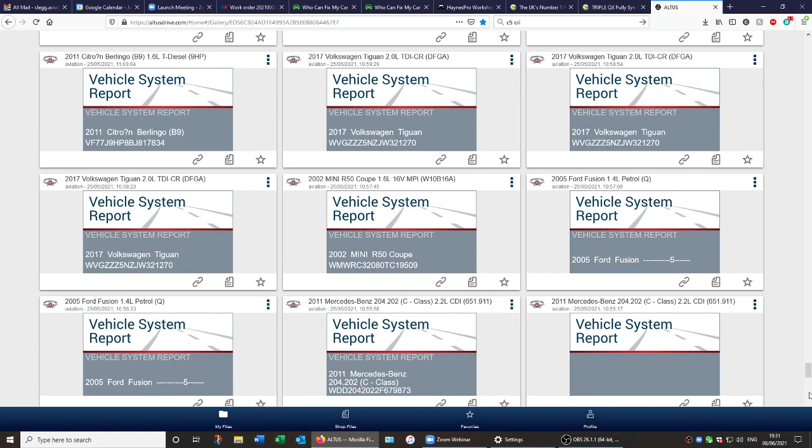It's worth noting, while I think about it, if you do a screenshot on your Zeus, that is also submitted to your cloud account. So when I scroll, you might notice now and again these are all reports, but as I scroll there might be the odd picture. That's a picture I just passed. There's a picture - that was a Corolla, I think there's a radar calibration, camera calibration I was doing. Anyhow, you'll see this in digital images. I'm sure I've got some - there you go, there's one there, I don't even know what that is. Test network connection, a few other bits and bobs. Okay, so these are all saved to my cloud account.

In case you're wondering, I got asked earlier today - if you press and hold the S button on your Zeus for 5 seconds, you'll see some icons appear. If any of you are watching this from the right-hand side, they'll come out the side of the software.

At the top, there are little buttons that appear: screenshot, camera, virtual keyboard, brightness. What I've done is chosen the S button. The Snap-on S button is right at the bottom of those icons that come out. Touch that, and then you can change what you want the S button to do yourself.

I've chosen a screenshot. So just quickly, if I press the S button, did you hear that guys? So it's just taken a screenshot of my home screen now. And then hopefully, if I refresh, see how good my internet is here. There you go guys, look.

So my name's Steve Fox. Obviously there's the date, guys, look. That's strange, well, I've got the wrong time. Ooh, I'm bad, I've got the wrong time set. That's my fault, I've got my account set up at the wrong time. I need to look at that clearly, don't I? Okay, but there's two screenshots that I've just taken actually there, right?

So I don't know, let's have a look at one, right? So if I click on here, it's just going to bring that up as a still photo. However, if I come back and look at one of the reports, if I look at this one, click that button, it'll open up as a PDF.

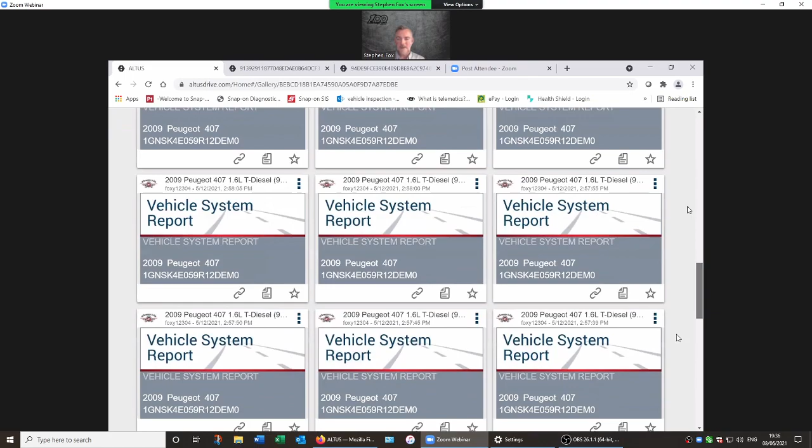Right, so where do we go to set this up? Actually, you know what, if we come back, get rid of that, I'll utilize this. So there's a couple of bits I want to show you. I think I did see one - there was a Corolla calibration.

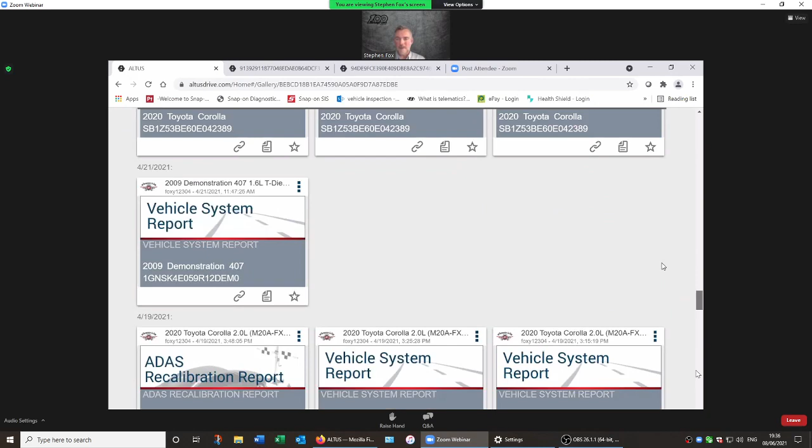So yeah, there's my Corolla scan, so there's a calibration report. So ADAS, Advanced Driver Assisted Systems.

Whilst I'm on this, I might as well just talk briefly about it. In 2015, a lot of manufacturers, via Euro NCAP, stipulated that to achieve a 5-star safety rating, they had to install 2 mandatory ADAS-associated safety systems. That could be ultrasonic park sensors, blind spot monitoring, whatever it happened to be. The point is, in 2015 they had to have 2 of these on.

Now next year, 2022, manufacturers have been told they've got to put 11 mandatory systems on. A couple of them will potentially be daunting. One is an alcohol interlock system of some description - you'll be breathalyzed before the vehicle will run. The other is a speed governor of some form. However, I'm led to believe you'll be able to turn those off, but still, the principle is they will be on the car.

As I've already said, in the future when we start looking at Wi-Fi, 5G cellular network, eventually they'll no doubt be networked - I can see it in the future. I don't know if it'll be in my lifespan, but there's a few targets and goals. I'm sure you've seen publicity around zero emissions and how the goalposts have moved rapidly. Lots of manufacturers now have been tasked with level 5 autonomy by 2030. From an EV world, JLR quite recently publicized that they think by 2025, 60% of their network fleet sold revenue vehicles will be EV. So you can see there's a trend coming, and then they'll be networked - that's the plan. So, advanced driver assisted systems.

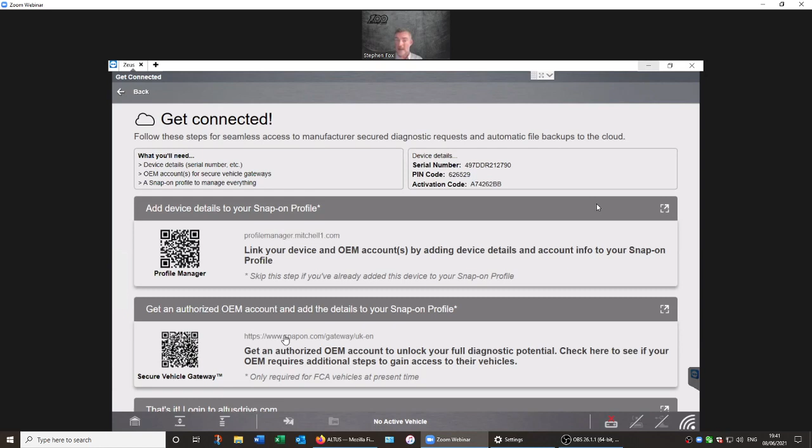Starting at the top, we have a profile manager - this is for your secure vehicle gateway access. You need to set a profile manager up, something that differentiates you with our scan tool to talk to Fiat Chrysler Automobiles. The next one along directs you to our website to show you what and where to go to set up the Fiat Chrysler Automobiles, FCA, website information and get authenticated with them. And the third one down is our Snap-on Cloud reporting, what you guys have just seen me show you.

All right, so that's altusdrive.com. Notice as I move my cursor, we go from a triangle - excuse me, I've just clicked it accidentally, profile manager was loading up - to a little pointer. If I move it down, it goes to the hand. It's a hyperlink. If I touch it, as it just did, it will open up a web page, because it's a PC, which is great. It'll just open up the page and start the process for you.

All right, so that's where I was setting up my cloud account. It's going to ask you, in your Snap-on Cloud, your Altus Drive at the bottom, your name, address, 3 security questions - it's quite security conscious - email address, and mobile phone number if you use it. But food for thought, definitely have a look. It's a cool feature that we're obviously going to add more features to.

Right, let's move on from here - paired devices. Now you shouldn't need to go in there, I pray and hope anyway, but it's a Bluetooth interface scan tool module. The Bluetooth module you plug into your vehicle is paired by Bluetooth. I don't think you'll have a need to go in there. The only reason, if I'm honest, is if we need to flash the hardware on it, so when you have a software update, ideally you should plug in - the scan tool doesn't update on its own.

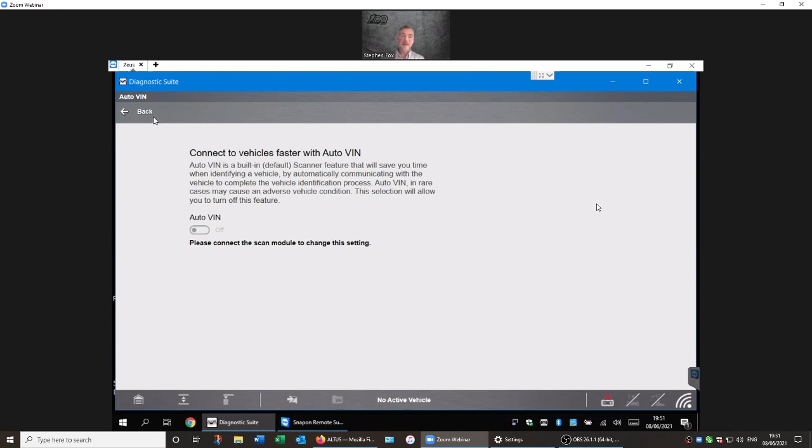What we'll try and do is take that from mode 9, because it's the OBD. Sadly, depending on the vehicle year, it won't always work. So you can turn that off if you wish by clicking it to off. But wherever possible, it's quite a nice feature. And like anything, as the years roll on and the older cars start falling off, we'll end up with a nice newish market, and eventually the older stuff will start falling off.

Right, fast track intelligent diagnostics, bottom left corner. And then I'm going to go into scanner.

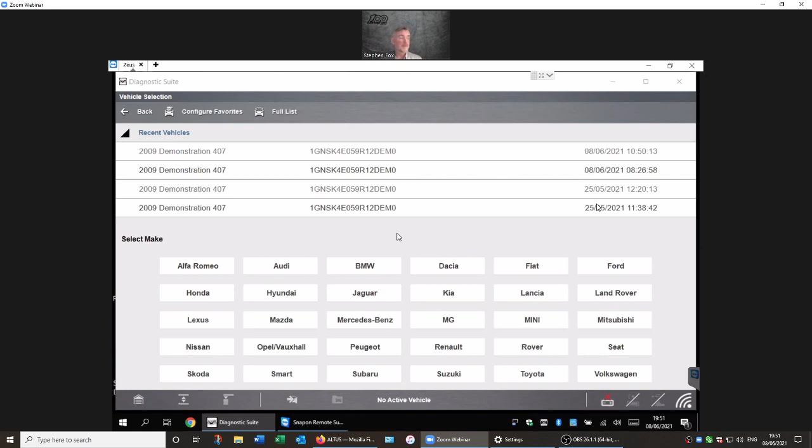You'll see these screens, these little black screens appear now and again. In case you were wondering what they are, predominantly for the franchisee network, because they're obviously demonstrating this out in the field - it's to help them really when they're talking to customers. So I've got into demonstration.

I'm going to choose my Peugeot. It's going to advise me - I'm in demonstration mode. Automatic ID and manual is going to try and pull all the credentials from the vehicle wherever it can. Again, this is incorporated in the engine control module, and some vehicles are not there. It's going to pull the VIN - we've got the VIN, let's assume make, model, year. And then mileage and the registration, relatively new feature to us.

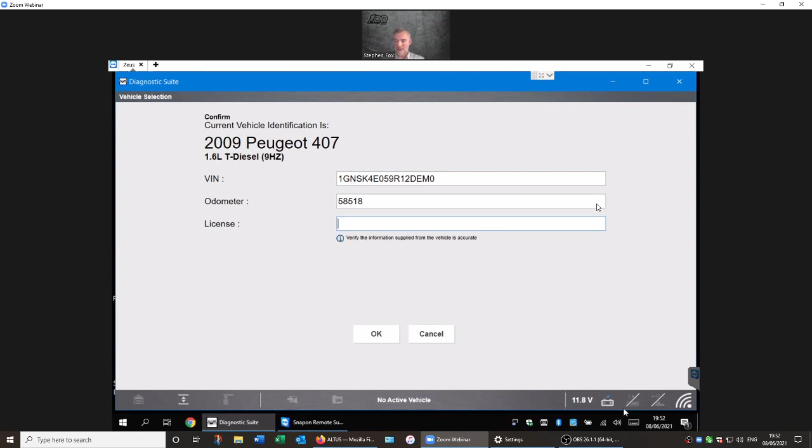So mileage, we try and get that from the instrumentation cluster, and then obviously populate our registration. Okay, so we're just going to populate a registration in there. Do you know what? Let's put in Rex. Right, JJ.

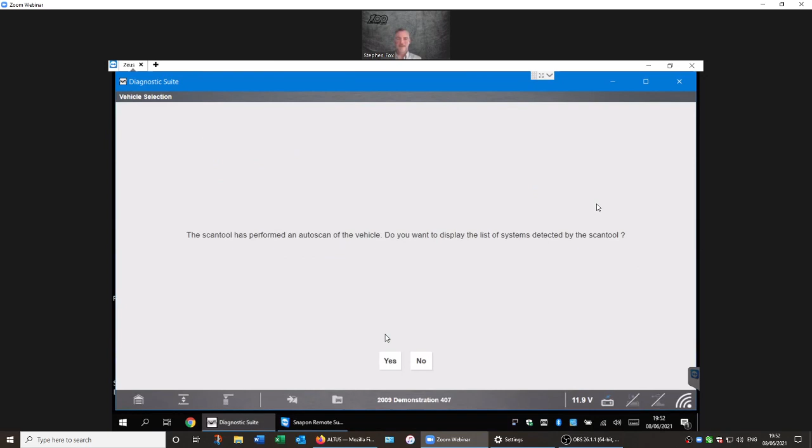Okay, so do a list of scan modules? Yes, I do. Right, at this point, if we've got communication and we're on subscription, hopefully you'll see it says service resets and relearns. And what we've tried to do here is retrieve all the common denominators from each control module, which we're looking at in this example. And we tried to put all the common service resets and relearns under one icon to save the customer having to navigate into each separate module to find said requirement.

All right, so hypothetically, let's just have a look at this one, and you're going to see these appear - so EGR, replaced injector, brake bleed. All right, so you get the idea, DPF regen and so forth. That's the idea - we try and retrieve it and pull it.

Code scan, right? Let's go to code scan. We mentioned this pre and post, so ideally I've not touched the vehicle - should really do a pre-scan. And as I said, don't forget, there's lots of independents that request this, certainly from a body repair specialist.

And if I'm totally honest, I wouldn't be surprised - this is not formal, guys, this is from me to you watching - I wouldn't be surprised if in the future we are tasked and they actually make us do this pre and post, simply because of ADAS.

Okay, so if you're going to adjust some suspension geometry, or ball joint, a track rod end - think of what I've just said - anything simplistic, take front bumper off, we need to obviously document that, right? So pre and post is going to be the way to go.

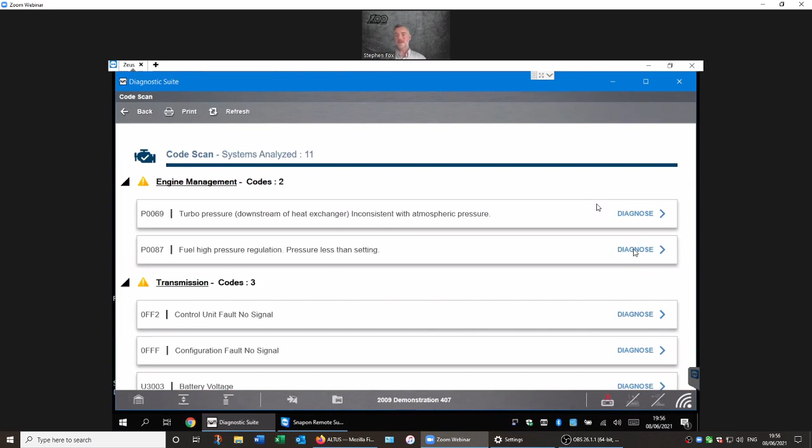Okay, so back to intelligent diagnostics. I'm going to choose under two codes, P0087. And then you'll see there's a major delay - I'm already on the Zeus. Come down here, give it a try.

So this is our landing page for fast track intelligent diag, and this was launched, as I said, on Zeus. As it says here, it's important we're on internet because it says connected.

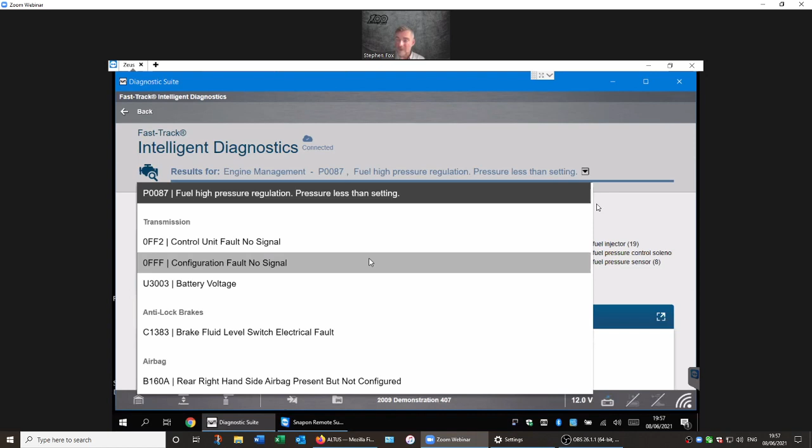All the other codes, see this drop down here - I want to address this because I've had a couple of customers say, well, do I have to go back up and choose a different code from the code scan and then come back to this screen? No, they're all in there from my code scan. I just choose the drop down, choose the code, and all the data will refresh based on the chosen code on our landing page. But I'm going to stick to P0087.

Over to the top left, TSBs - technical service bulletins and OEM recalls. As I said, this is a repair information suite. This icon takes me into the information icon on your home screen, except we're already in the vehicle, so it populates that information. This TSB with the red circle tells me straight away on this vehicle, on this fault code, I have a TSB and a recall. And I want to address that.

This vehicle, that fault code, I have a TSB. If there's a green tick there, then you're all good, not applicable. But I want to address it because certainly the previous machine, we had a Verus Edge - it had TSBs and recalls, but it didn't have fast track intelligent diagnostics and it wouldn't filter that out. You might have to look through 30 or 40 TSBs.

I can remember we had a Golf, a 2012 1.6 Golf - can't remember the engine code, guys, it was a 4-digit one. Anyway, it had an umpteen amount of TSBs. And obviously, with a fault code, you've got to look through them, and that's time, right? So with this, it's going to tell us straight away the TSB or recall related to that code.

So I'll obviously click that now, and it's going to take me to... I don't want to do that because I'm conscious of time. Over to the top repairs graph.

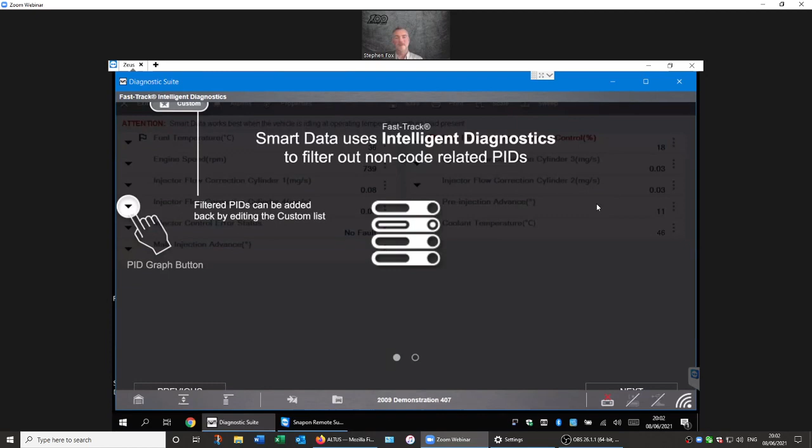In our example here, if I click into smart data, it must be on the internet, and the vehicle must be up to temperature and idling. Give it a try. Yes, ignition's on and I'm running. You'll see that all the parameters would normally be on both sides here, and I'll have to scroll.

Take a note of the 2 blue ones. The blue flags, 2 blue flags, that means we're watching the live data values and we know if they're any good or bad. So we've got rid of all the stuff we don't need, left you with the stuff we do, and we've said these 2 here, we know what good looks like. In a minute they should go red, which indicates red flag, red value means that's an issue right now, out of tolerance right now. Red flag, blue numeric value means it's fallen out of tolerance but it's back within spec right now.

That black screen that appeared was a recording of live data. And remember our job card down the bottom here, which I saved with the PDF? Touch that, look, there's the demonstration vehicle being recorded. So it's actually recorded a live data video, straight to the vehicle job card on our software.

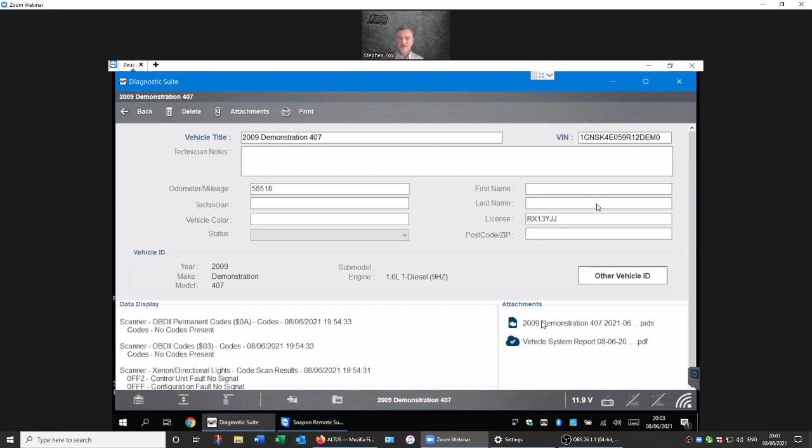Remember, you can back this up on the USB stick. Home screen, bottom left, back to scanner, that's going to take me back where we left off.

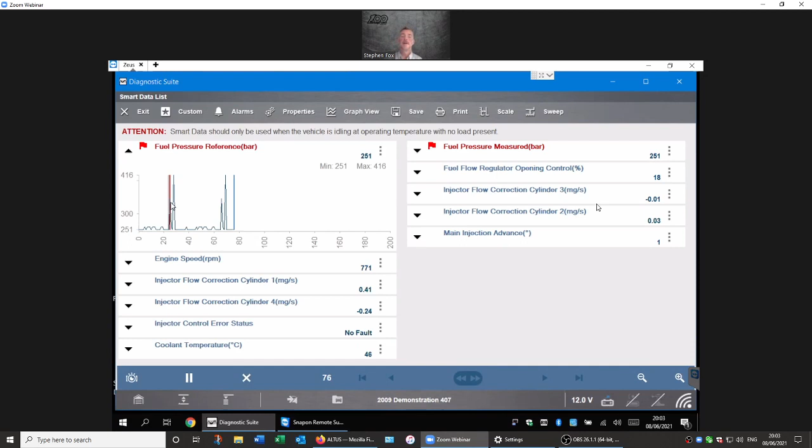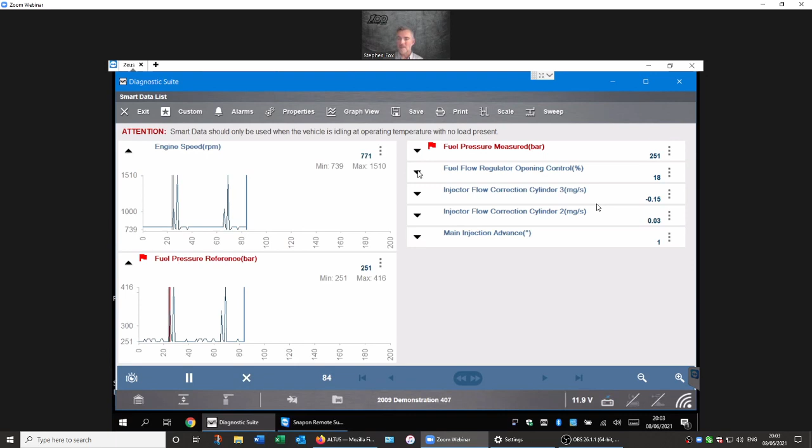If I drop one of these graphs down, the arrows next to the vehicle PID, the red vertical line is going to indicate where your tolerance exceeded a good known value. Every other PID, if I drop down, they'll always jump to the top. You see, I clicked on engine speed and it was beneath, and it jumps to the top. So fuel control opening percentage value jumps to the top. But notice the gray vertical line, that's going to relate to where my red vertical cursor fell out of tolerance. It's visually going to help me diagnostically relate all the other parameters.

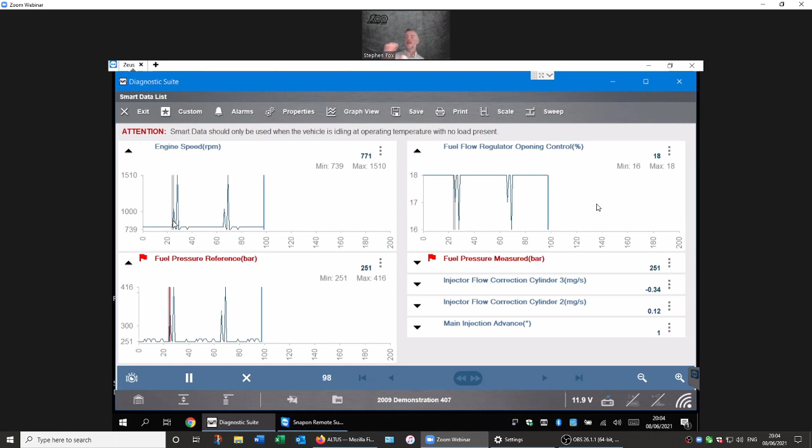So that's what smart data is. Back, top left, go to exit. I could go back into smart data, which I don't want to. I could wander off down here anywhere on the vehicle. Top left again, I want to come back to our landing screen.

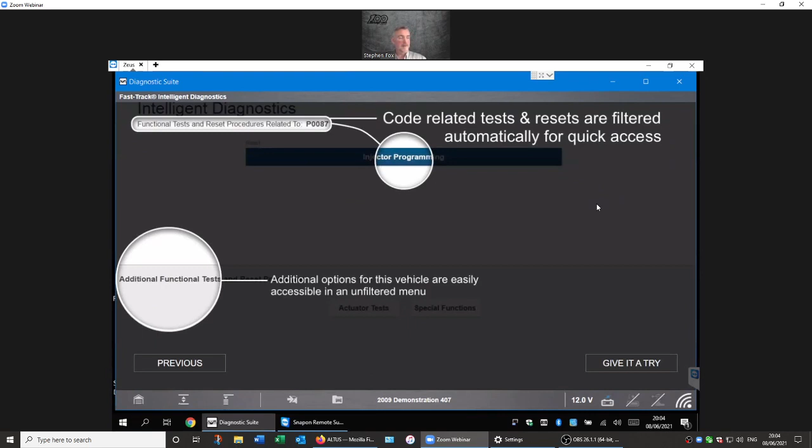Next one down from here is functional tests and reset procedures. We've noticed certainly over the last few years, if I give it a try, because we basically capture all our own software.

We've noticed that a lot of the OE factory tools are starting to put certain functions and features in perhaps the least expected place. So they might put a particular function in a module you kind of least expect it to be. So again, everything you need, nothing you don't.

Fast track intelligent diagnostics. If we have this information from that code, based on what you guys have just seen - if you remember, my common denominator at my top repairs graph was injector - we're going to make the assumption now that if you're going to replace that, you're probably going to need to program a new one in once you've replaced it. This could be anything. It could be we've got a misfire now and I need to reset fuel trims. It'll be in here, for example.

It could be a window regulator issue and there's a functional test to check the functionality of that regulator. Does it make a noise when I activate that solenoid, for example, hypothetically? But yeah, so this is the idea - we isolate it into one icon.

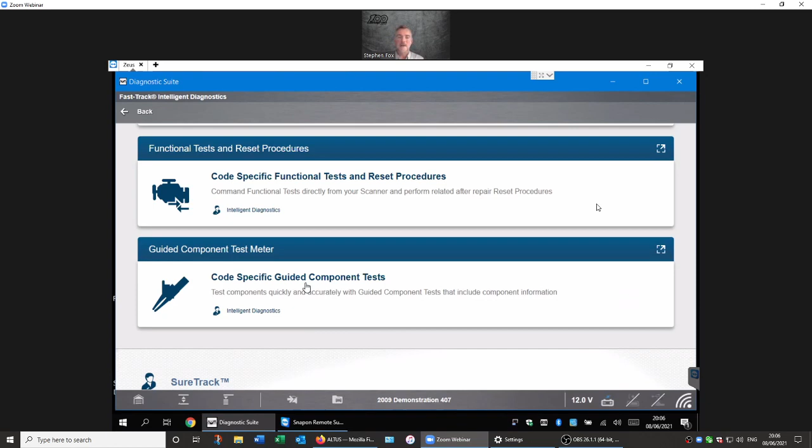Oh, no updates, that's good. Right, so top left, if I then come down, guided component tests, we'll expand on that in a second. 13 years we've been collecting this, and I want to address that we collect this out in the field ourselves. We don't purchase this in. And as I said earlier, if you picked up right at the very start, I was heavily involved in this for those 6 years when I started at Snap-on, my first sort of 6 years of my career.

So guided component tests, scroll down, give it a try. You know, it's going to say we need to test that injector. We don't want you ordering a £300 Ford Galaxy injector from Ford's and then getting it wrong, right? So we need to test it.

Component information, DC, we'll dig into these in a little while. Signature test, that's the integrity, isn't it? And then current ramp - it's going to be a current ramp test on the injector because the injector is classed as an output, right? So we have inputs and outputs.

Then we have inputs like cam, crank, boost pressure, intake air temperature, mass airflow - they're all inputs. They send the information back to the ECM. Whereas if we take a fuel pump, solenoid, actuator, that sort of stuff, they're classed as outputs. And fundamentally, the engine ECU dictates current flow through to those components depending on the input information to denote how much requirement is needed for our fuel pump, injectors, etc.

So in this case, if we know how much current flowing through our injector is actually going on, then we get a nice, good, true analogy - actually, is that component doing any work or is it not? Because remember, an injector could have voltage sent to it, but really I want to know what current's flowing through it - is it actually doing anything? And the beauty is with a scope, it'll generate a waveform, and that waveform gives me a true analogy of what exactly is going on with that component.

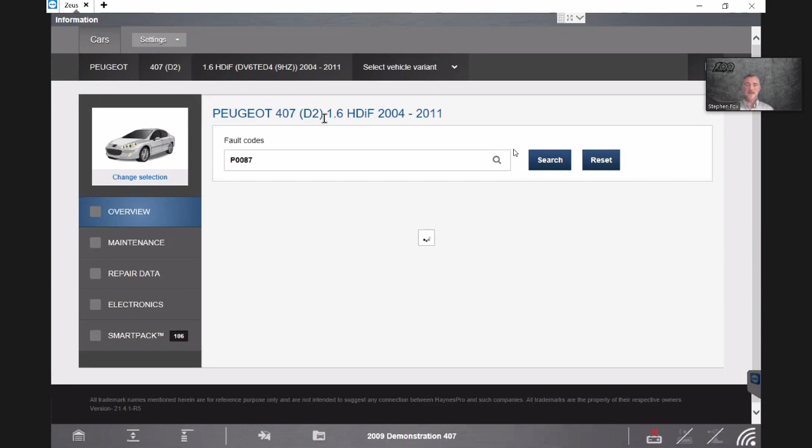Okay, so this is our repair information screen, remember? There's my Peugeot, 407 1.6, 9HZ, P0087.

It's going to give me an option now. So over the left, repair information, repair data, maintenance. So frequency, service intervals, what do I need to check? Do I need to change the pollen filter or not? API rating for oil quantities, drain plugs, repair data.

If you've ever changed a timing belt on an XYZ car before, it's worth having a look. There's repair information in there, a nice step through removal and installation process of a timing belt using this Peugeot. And there's also drawings associated, and it gives you the timing pins, the OE part numbers for the timing pins.

Electronics, so wiring diagrams, test plans, we'll get to them in a second, and smart data. On the left here is your OEM campaigns, recalls, and technical service bulletins. So I'm going to pick the top one.

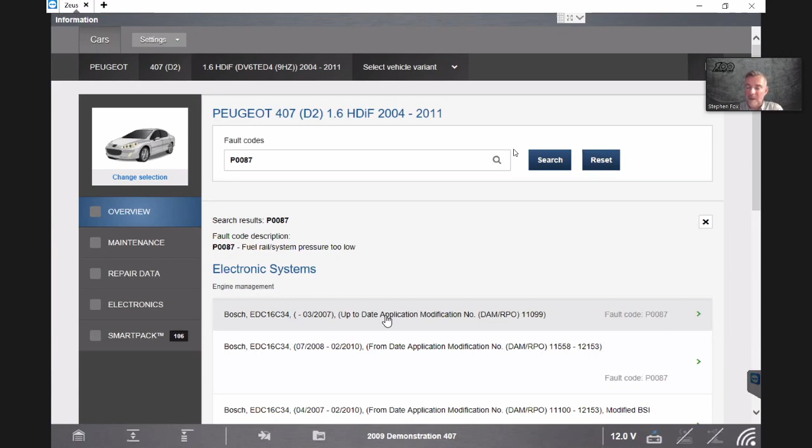It does look, if you notice my Peugeot, it's kind of derived from the year that's applicable. So I'll just pick the top one because I want to show you some of the features in case you was unaware. So that was directing me towards a fuel pressure delivery issue.

So I'm going to go with control valve. Now over here, look, it's isolated circuit. E1 is going to be my engine control module. We've got a motor there, valve control motor, mass airflow incorporating intake air temperature. And this one, the red box, is going to be our fuel pressure control valve. Okay, so that's red, notice we've got pin 1 and pin 2.

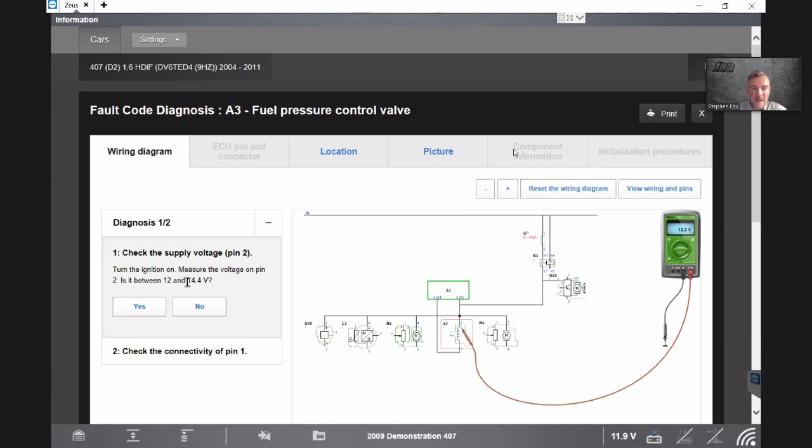Over the left, it's going to say, right, diagnosis, check the supply voltage, shows me where to put the probes and the multimeter. And it says, over here, should it be, I don't want to read it word for word, X and Y voltage, yes and no.

Last test. You'll always find at the end of the test here, in case the answer is no, you've got to be redirected to somewhere else. In this case, it's telling me that I need to go to the engine control module. I'm not going to do these 7 or 8 checks, whatever there is.

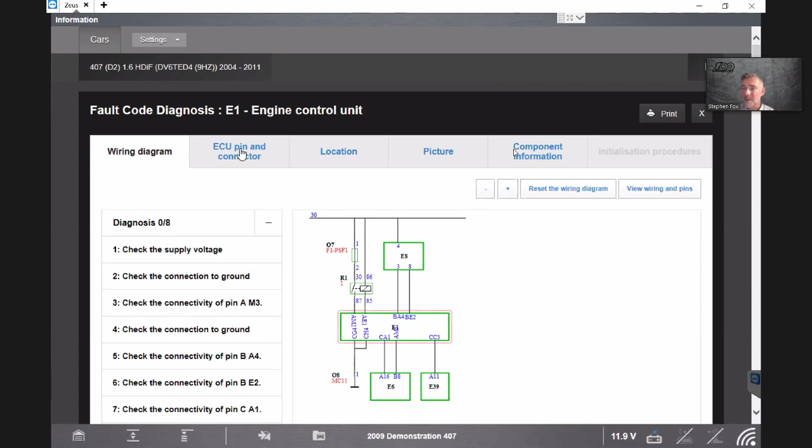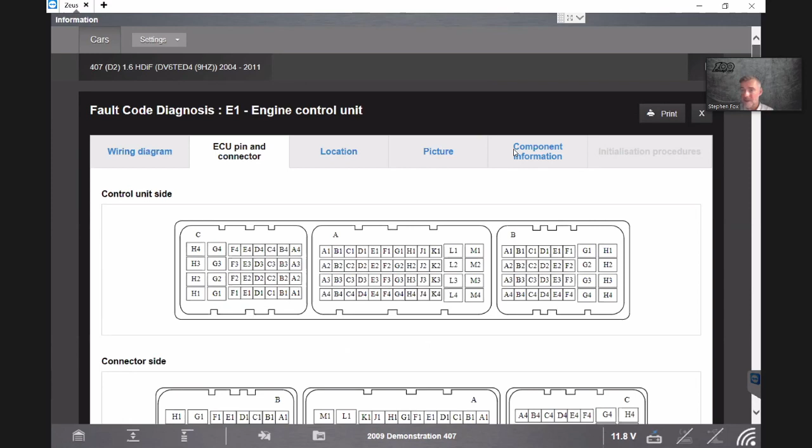But whilst we're at engine control module, if you take a look at pin data now, ECU pin data, both control unit and connector side, and all the pins are underneath. And if I then click on the word show, you've guessed it, if I go back up, this is very similar to most tablets these days, pinch and zoom in the repair information.

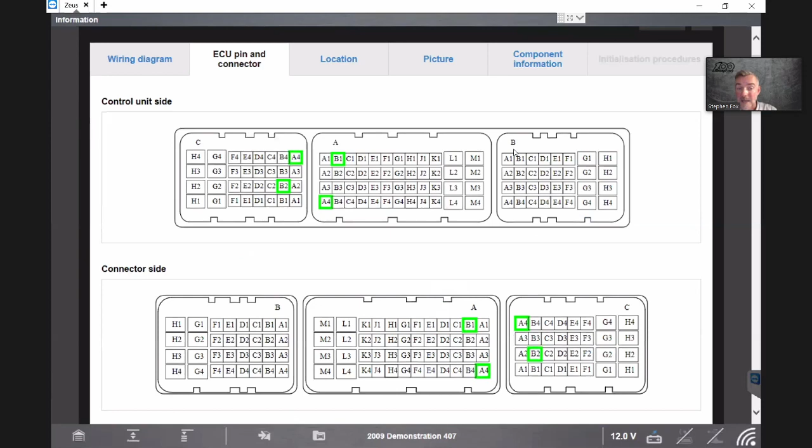You can actually see my fingers that have been held on the screen. Okay, so pinch and zoom.

Obviously, you may or may not have noticed the top right corner as well. Everything in the repair information always has print at the top right corner. So you can print it if you've got your Zeus connected to a network printer, hardwired via USB, or however you've got it set up. Or obviously you could download this, because we're viewing my Zeus locally, as a PDF directly onto the Zeus itself.

So location is going to tell me where the engine ECU is and all the other modules associated.

You can tell my son's at home, can't you? Look at the internet.

Picture. So there's a picture, obviously, of our engine ECU and component information. So it's worth noting, a couple of times over here, I've been on a component, say fuel pressure sensor, and it's actually giving me the live data readings and oscilloscope waveform settings. So it's pretty cool, worth definitely having a look at.

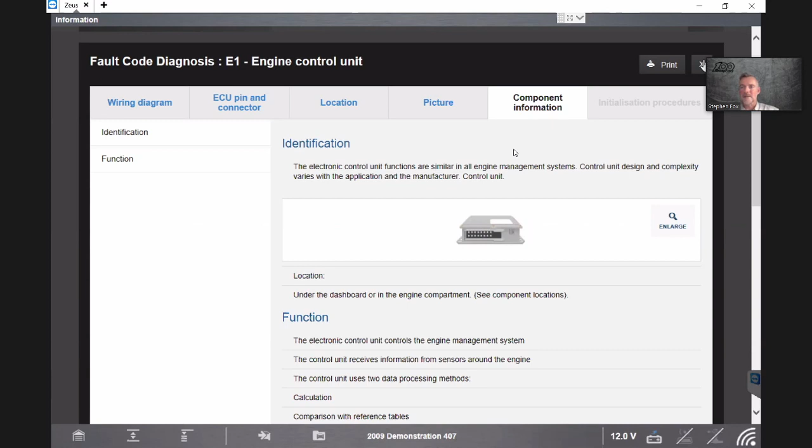Okay, so if I just close this, I'm going to close this now, hit the cross to close that down. He says, I don't want to keep pressing it, do you, Steve? No, because this is where it all goes wrong. There we go.

Okay, so if I now go to top left and go to cars, you'll see there's a registration lookup at the top right. Now, there's so much of it, to be fair, in here.

You can even go into settings. Oh, my cursor's having a wobbly now. Go to settings, go to preferences, and tailor your account settings. So when you print from this information suite, that also has all your business details. You can even build up invoicing incorporated in this information suite on your Zeus. And you can do euros, pounds, VAT, quantity, there's loads of stuff you can do. Just need to have a look, guys, at this and spend a bit of time in here.

So I wanted to do, because I've still got quite a bit to do, is put a registration in here. Now, you can see there's a few oddball manufacturers down there, which we could look at, but I'm still hung up over this.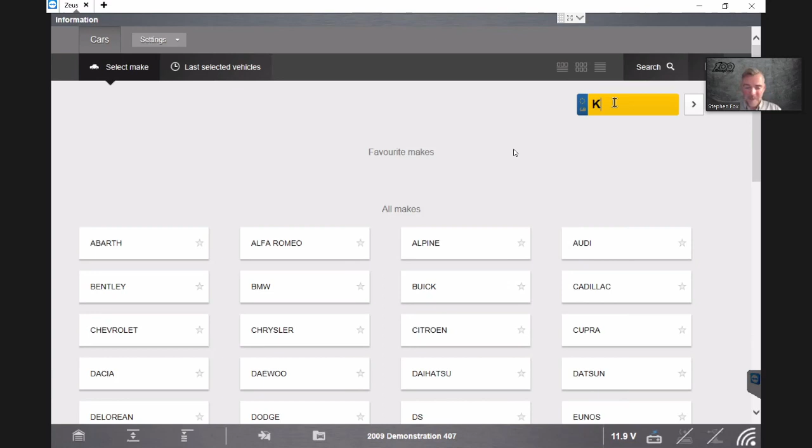This registration I put in, I do think it was last month. We're in May, it must have been May. I was live in front of customers like I am now. And this is my company vehicle registration, hybrid Corolla. I put the registration in and clicked the button.

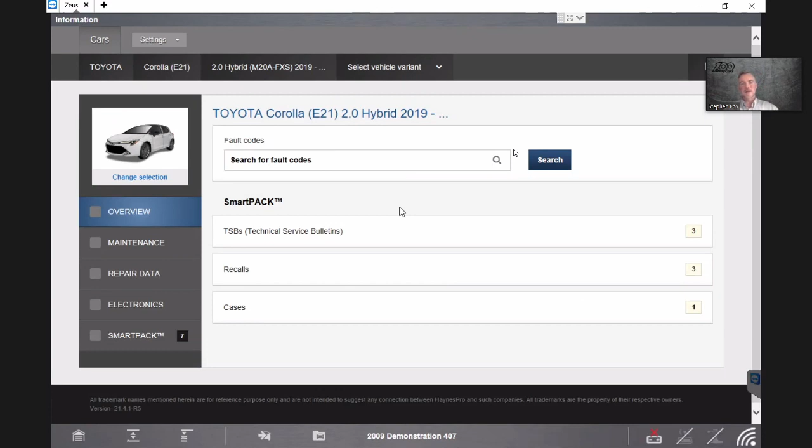I just randomly put it in, and I was like, oh my God. This is ironic because the TSBs here, I clicked on and I was like, no way, adaptive cruise. For a little while now I've been noticing it's due its service, I think it's done 16,500 miles roughly.

These Corollas are every 10,000, so it'll go in soon, won't take long I'm sure. But anyway, there's been occasions when it's switched on, I'm following a car, let's say they indicate, they turn off, the car brakes fine, they've now gone, they've made their decision and gone, but the car still drags the brakes on for far too long, in my opinion, and then it starts to accelerate.

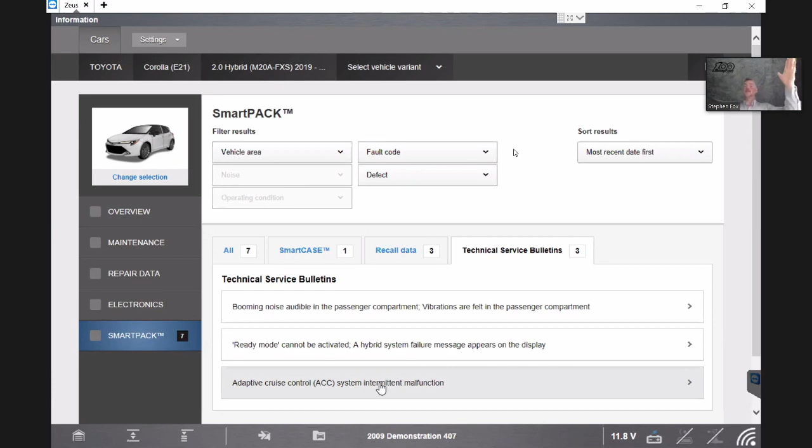So I don't know what that's about, but I happened to see this and I clicked the button. I was like, oh, that's strange. So they've obviously got some sort of issue related to the radar sensor, but it's quite cool because it says I need to check the serial number.

Obviously I'm not going to remove my bumper and start having a look, because I've got to do that to get to mine on the Corolla. So I'm not going to do that, because I'd need to calibrate it. Although I could do it at work, but it's irrelevant.

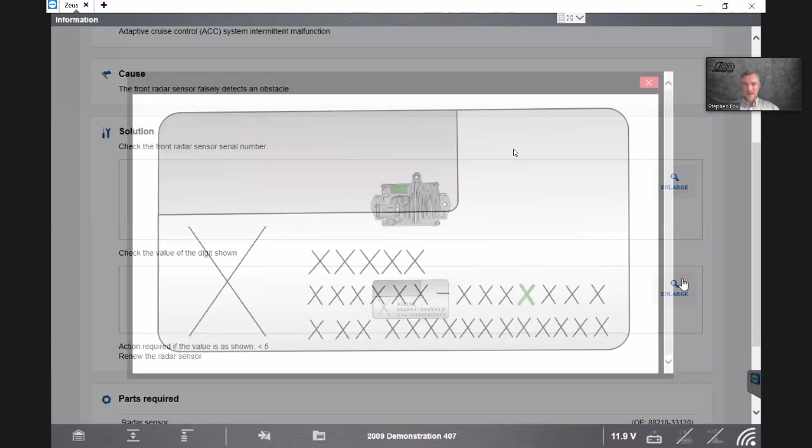But if I look down here, it's saying I need to check the serial number, okay, so it's on that plate. And over here, check the value of the digit shown, continue. Right, that's the digit I need to pay attention to. Then it says here, action required if the value is as shown under 5, alright, so renew the sensor. So I am quite curious to see what the outcome is when it goes back.

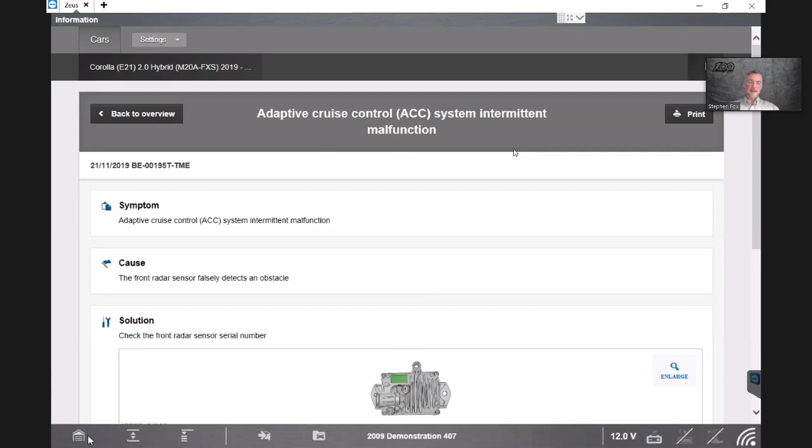Definitely, okay, anyway, right, so bottom left I'm going to press change vehicle. Okay, and then I'm going to hit scope multimeter. Now, unfortunately I've left that still from the last time, so what I'm going to do is move my camera.

I've got so many things on the go here. Hey, right, let's get this shut down. Shut down. Oh, hang on a minute, is that because it's open somewhere else? Right, it doesn't matter, it doesn't matter.

Okay, right, so on our home screen now I'm going to go into LabScope, if you happen to be with me. Yes, there's a few options here, presets. You can actually save your own presets, so maybe you go into the blank scope multimeter, spend a while setting something up, and you think, I've got it, oh, I'm going to forget this next time round.

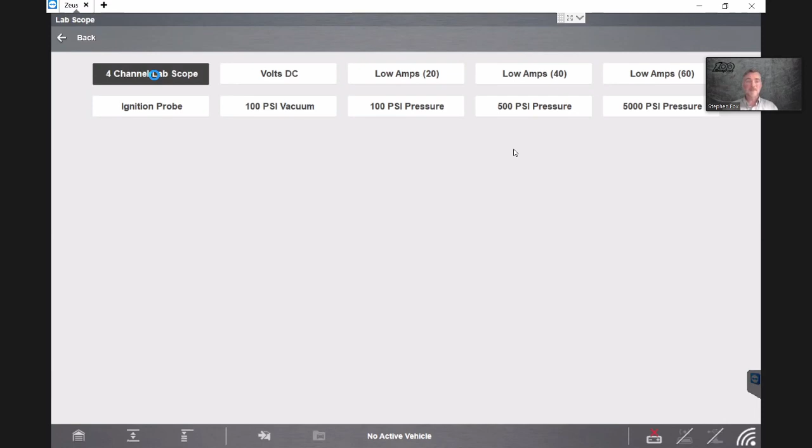I test a mass airflow, you can actually save it and then save it as a preset and name that file. But I'm going to go into scope multimeter or lab scope, choose 4-channel lab scope. Now you'll hear that noise - that's the scope calibrating the circuit board, little relays, cleaning the contacts.

If you've never been in here before, guys, you will probably see something like this. I don't know if you've seen that, or that, but I suspect if you've never been in here before, probably what I'm looking at right now. So we've got 4 channels switched on, i.e. we can test 4 components at once.

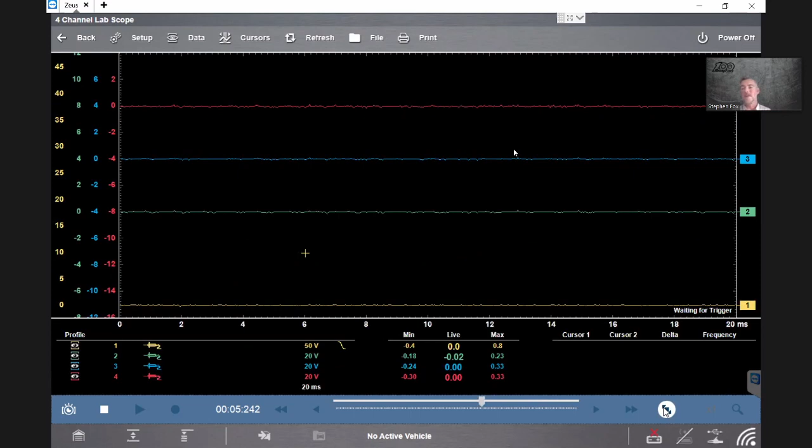We're going to change some values, okay? This screen is full screen scope, and this screen is data. I'm going to measure something utilizing the scope. Data, diagnostic data, let's call it. So data to change, we're going to make a change on full screen scope, and then data that we're going to evaluate from a diagnostic point of view.

So what I'm going to do is get these other channels off. Over here, under word profile, switch off everyone other than my yellow one. Zoom's quite cool these days, it's come a long way. Look, second camera - you can see I have my Zeus next to me, my waveform generator board here, a little car, and I had these probes connected to the top. The reason I've done this is to show you how to connect up your scope, because I do not want customers to damage their Zeus module, their scope module.

In a classroom, at this point in the afternoon with a set of customers, I get all the Zeus scope leads out of the kit and have them connect them up to the Zeus how they think they should be connected. It was brilliant because obviously everyone would look around at everyone else, all the peers, making sure they don't do anything wrong. And the answer is there is no right and wrong.

Not really, because you'll get the same answer if I leave this hanging, the same answer if I put them both in, the same answer if I just put this one in and take this one out. Because if you look, guys, I've got 2 black leads and I've got 1 on the other end, so it's a common ground. But I would like you to do what I've done.

That's a flat right angle probe, and this one's got like a stalk on the end. So pull that one out, so that it's perfectly got the right angle probe, pop that in there. The reason is when you get the yellow probe out and go to connect that up, because maybe one day when you get into your scope, you think, I want to test the cam and crank sensors simultaneously and check if the timing's out.

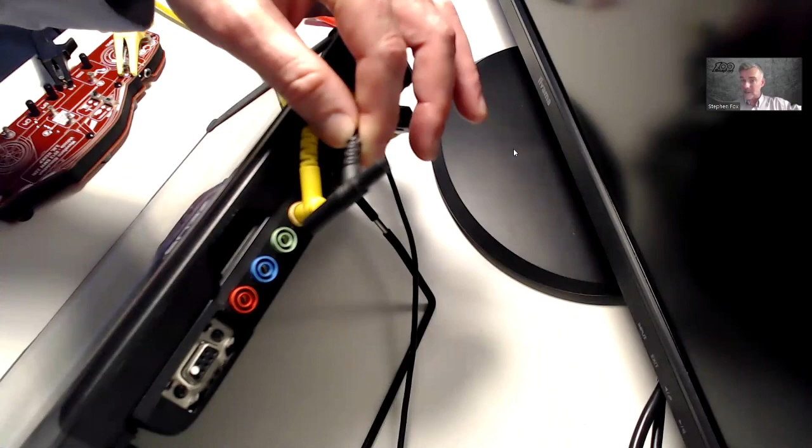So maybe I want to see if the belt's jumped or chain stretched, because that's pretty cool - some nice feature you could do with a Zeus with a scope. And maybe you think you want to do that - you put in your green lead, and the green lead has another black lead which needs to be grounded. So what I'm asking you to do is, if you'd be so kind, to just piggyback your green lead's associate black lead onto this one. That way you don't end up with a massive stalk up here.

Because what I have seen over the past years is customers connect it like that, and then, you guessed it, they're in a footwell testing an accelerator pedal position sensor one day, accidentally lean on the Zeus, and there's a crunch. I bet your bottom dollar it will not be the leads that break - it will be the leads that cause the scope module internally, because that's plugged in, to get a nasty little crunch, and the Zeus module goes down, and then sadly it'll have to be sent for repair. And then obviously they're going to ask, hey, what was happening here? So from my end, just try and keep these all nice and flat and nice and neat.

So what I'm doing now is going back to my Zeus, and I'll probably go back to my camera. I was just thinking, can I do that now? No, we need to come back to here. Right, moving across the settings, channel 1. All right, so I'm on channel 1. I'm going to test one component, yellow in color.

Next over is probe. If I touch on probe, now at this stage I can't see you guys, of course, but in a classroom, people would frown now - vacuum pressure. Now the scope, obviously, we have the blank canvas scope that you guys get in a kit, and you have the 4-channel scope leads, you have ignition probe, your little copper adapter, coil over plug, but there's loads of accessories you can get with a scope if you're into it. First and foremost is a transducer, and the transducer implicates we can test vacuum and pressure.

So if we think of vacuum, we think of a Mityvac that some of you guys may be using currently. If you think of an old diaphragm EGR valve, like an old PD Volkswagen lump, you'd put the analog gauge in there, apply some vacuum and see if your gauge holds pressure, and you'd be happy the diaphragm isn't leaking. The scope will do that.

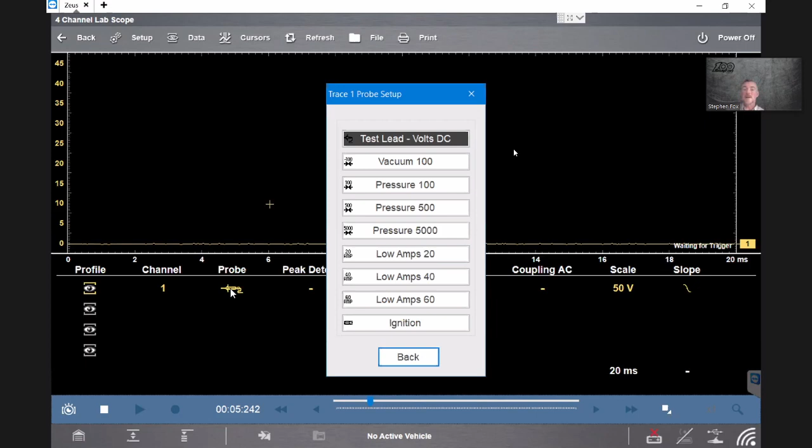And then obviously from this point of view, whilst you're on it, we're obviously looking for a signal that looks far different to the other three. But anyway, let's stick with our test leads at the top, volts DC. I'm going to press back, moving across, peak detect.

If I click on that, what looks like little mountains appear. What's happening when you click that is the scope is sampling at its current fastest rate, which is 6 million times a second. Yes, I did say 6 million times a second. I want to put that in context very quickly. If we take a standard class 4 voltmeter, generally you'll find if you look at the instructions and somewhere get into the specs, I'm fairly confident it'll sample at 250 milliseconds. So 4 times a second, it'll take a refresh and plot that reading on the screen.

Now, if we talk about a petrol injector on a modern car, say a 10-year-old car, the time base setting on the scope is going to be approximately 10 or 20 milliseconds to see that injector open and close once. Now, I've already told you the voltmeter, if we were to back probe that injector, is going to sample at 250. I don't want to do the maths - how many 20s are in 250. I don't need to. What I do know is the injector has opened and closed a lot of times before my voltmeter has even registered a difference.

So let's put that in practice. Think about this: if you take your voltmeter when you leave here tomorrow, if you've got the luxury of doing so, get your voltmeter out. There'll be 2 leads off your voltmeter. Get a petrol car, start it up, put 2 pins on that injector - 12 volt ignition feed and a switched ground from the transistor in the ECM. Back probe your red, or whatever color it is, your positive lead, and back probe the switch ground wire.

Now this is the EETA 308D amps clamp. And as I said, I'm not trying to sell it, guys. I'm just merely saying, in my own humble opinion, from everyday testing, this is all you'll need. Everyday testing, I'm not talking about doing the geeky stuff. Just petrol, current draw, parasitic draw, battery drains, run of the mill, you know, injector testing, relays, fuel pumps.

This is your kiddie. Now the reason I wanted to show you it though is when you scope on the setting that said inverted on my scope, we'll get to it in a sec, back to it in a sec. There was a button that said inverted. Now it's asking me to put this amps clamp around the correct polarity of the circuit. Which way in the circuit does the current flow?

And then sometimes when you're in the engine bay with this, let's say I was testing an injector and I wanted to look at the current flow in the injector, I couldn't put it around the correct way because there might have been two or three other bracketries, wiring loom, harness, clips, and I just wanted to get this wire around, right? I just wanted to get this clamp around that wire quickly. I didn't want to spend 20 minutes, half an hour taking the car apart just to get this around. But if I flicked it upside down, I was able to get it on the incorrect way. And what would happen is the waveform on the scope would be inverted, upside down. And then I'd click the word invert on the scope and it'll present it the correct way.

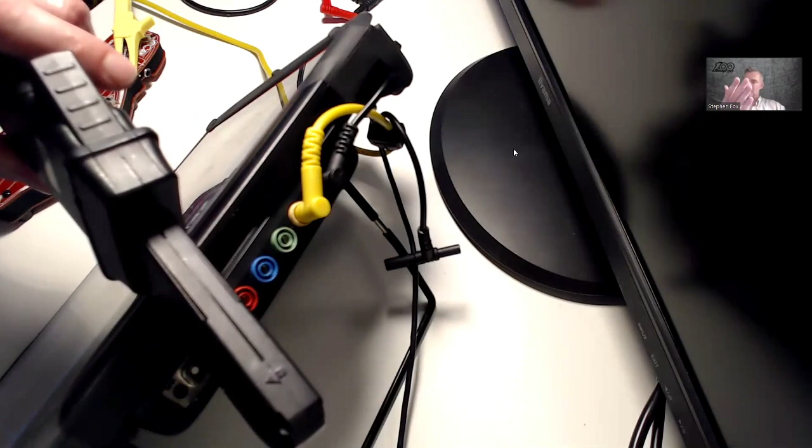And if you look, guys, you can just see, try and get my light, can you see the arrow right in the top of the jaws here? Look, and that's what it's asking for. Which way is the polarity in the circuit? Okay, so that's the EETA 308D. Cracking bit of kit, that.

Right, so back to my scope. There you go. Right, so yeah, inverted. So I click that and it would flick up the image the correct way.

AC coupling, again, not to deviate to advanced diagnostics, but there's a lot of reasons why you might want to switch that on when it comes to advanced oscilloscope diagnostics. But from an everyday testing, I can think of only one component you'd need to switch that on. If I think of general testing in the engine bay, all the components, boost pressure actuators, accelerator pedal, throttle potentiometers, throttle motors, EGR valves, EGR position sensors, mass airflow map, I could go on.

If I think of all of those, it's only one, and it'll be an active wheel speed sensor. So 20 years ago, they still had 2 wires, didn't they?

Wheel speed sensors 20 years ago would have 2 wires and an AC waveform generator component. The actual component itself would generate its own voltage with coil windings in the sensor. As the magnet passed, it would generate voltage, and as you spun the wheel faster, the amplitude would increase - the voltage would get larger - and the frequency too, so we'd see more of those oscillating, alternating current lines. But now, most cars - and when I say most, I'm probably going back 10 years - there might be the odd couple of manufacturer models, but as a general rule, most will have active wheel speed sensors.

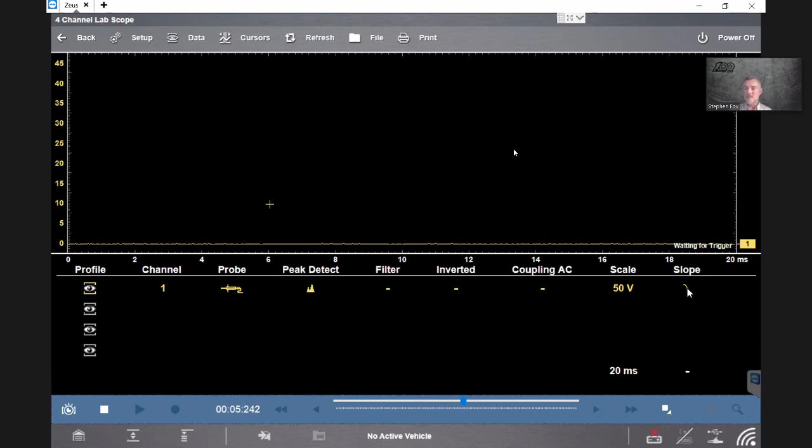Slope is going to make sense when I press this button. So I've now got my waveform generator board, and we are connected to a petrol injector. Before we continue, just draw your attention to the white numeric value at the bottom right corner where it says milliseconds, 20 - I want to touch on that.

Very quickly, if we look up here, it looks like a funny 'us' - that stands as a symbol for microseconds. Just to mash your heads a little, that's millionths of a second, not milliseconds down here, which we're probably used to from motorsport. We're now talking micro. To put that in context, 200 microseconds is your standard CAN bus protocol speed - 2.0A standard CAN, you'd need to be on 200 microseconds to capture a waveform.

So right the way up to 20 seconds - if I hit 20 seconds, whatever's going on in my signal is going to take 20 seconds to get to the end here, and it will start plotting again back over there. So I'm going to go to 20... I'm not going to blame my boy, he's obviously having a... doing something. There you go, we're back, we're back. Right, 20 milliseconds - okay, back to my injector.

Now the slope, which we didn't touch on, relates to this trigger - this cross is a trigger. Years ago, before electronic ignition - hence the grey hair - I was around with condensers and points and distributors and a strobe light. The trigger is the same principle as a strobe light, for those watching who remember that. The strobe light used to illuminate for us as techs to identify how and where I needed to be regarding our advance or retard. So much like that, the scope can see a pattern, it can see something's happening, but it needs a trigger point to hold that image static for us to evaluate from a diagnostic point of view.

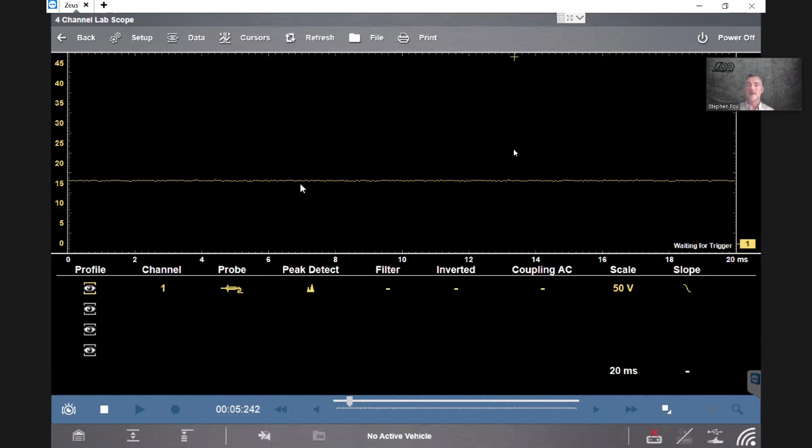Let me quickly put that into context. If I drag this cross over to here and drop it, it'll plot it there. But if I drag this cross well above its peak voltage, its highest point, past that, and then take my finger off, you can see now it's no longer static. If you keep looking, it still sees it and knows something's going on, but it has no way of holding it static. So I need to bring that trigger down, and based on wherever I position it, it's going to plot it accordingly.

Okay, so I'll go with there. Right, so this is our petrol injector.

Okay guys, so what's going on? Remember I said 2 wires, 12-volt supply and 1 switch ground transistor. I'm now back probing our fictitious switch ground. So we go over to the left, vehicle's running, what's going on? Roughly 14 volts, 14.25, whatever it happens to be.

And then the ECM commands the injector to be switched on. Switch on, pulls the circuit down to ground, which is why we see it go roughly as close as we can get to 0 volts, because that's what you want.

And then this bit here is arguably the duration of which the ECM has commanded the injector to be on. We refer to it, posh talk, as pulse width or injector on time. And then the ECM switches the injector off.

Okay, so much like an ignition coil, all that voltage stored in the coil windings of our injector creates what we call electromotive force, or inductive kick as a posh term. That massive spike appears on a real car. Bear in mind we're using a 9-volt battery on a waveform board. If this were 12-volt, that'd be more like 70 volts on a real car. Okay, so massive inductive kick.

And then thinking now inside the internals of our injector, the injector's now coming back down at a high rate. It's got a spring behind it as well, isn't it? We've got pressure that's just been deposited, and it's coming down to smash on the seat. The problem is it comes down at such a rate, we need something to control that speed, that rate.

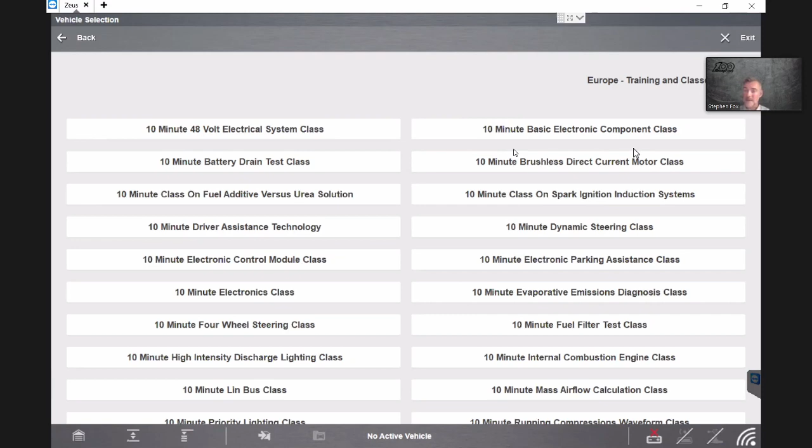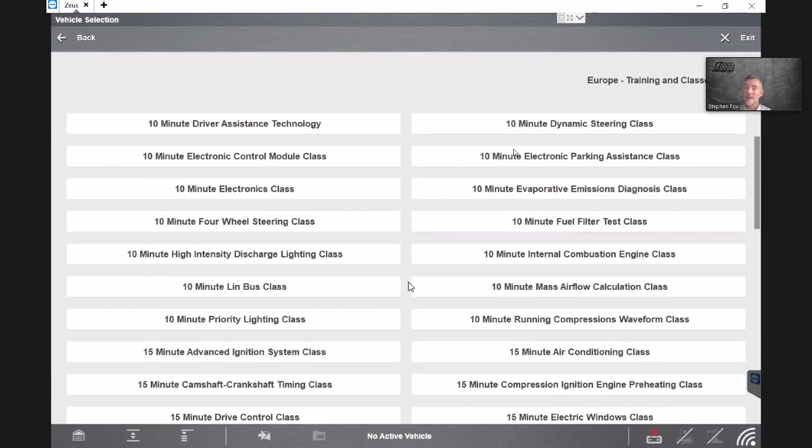Guided component tests - I'm going to go to Europe, and then we're going to have a quick dip into how-tos, because this will also take me into our guided component test, which we'll look at in a sec. As I said earlier, these are all tutorials. You'll find a lot of these incorporated with live data or oscilloscope tests associated to them.

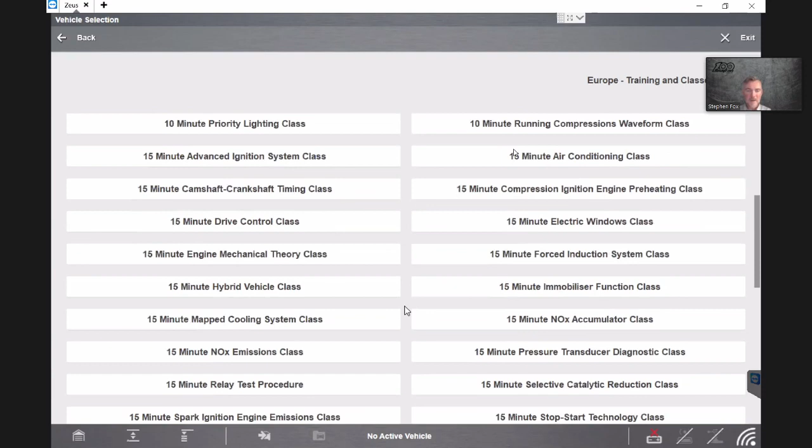Definitely have a look. What I wanted to show you though, guys, is it's a NOx accumulator one. It's pretty cool, a 15-minute waveform class. Firstly, let's look at injector.

We'll get to the O2 sensor. We've just done this as a quick summary, really, didn't we? We'll give a bit of an overview - what I did, electromotive force. I don't want to read it, I'm just trying to say, guys, it's in there step by step. And there's quite a few of these in here, to be fair.

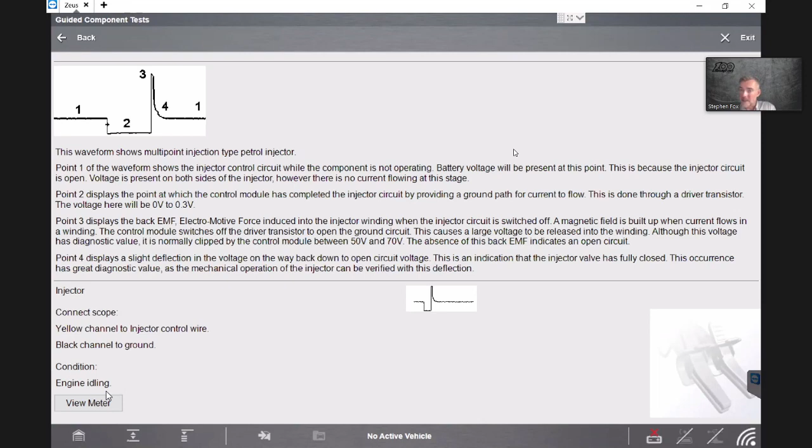So when you're scoping stuff, what does that mean? What does it look like? What should it look like? Bottom left corner, view meter, so the scope calibrates. Top left, go back again. O2 sensor, zirconia.

Remember, again, grey hair, carburetors, 14.7 to 1, something we don't hear these days. Stoichiometric, you can see at the bottom, there is a resemblance, air-fuel ratio. That's its job, isn't it? It's trying - our O2 sensors are ultimately trying to maintain 14.7 to 1, all right?

So when we think of an O2 sensor, 0.1 of a volt from a signal wire means a lean mixture, 0.8 is rich. So when I said 1 Hertz, if you look here, a good sensor should switch from rich to lean approximately once per second, or 1 Hertz. So now you know when we look over here, 1 to 2. Basically, if we had this on an oscilloscope now, I would probably have a 2-volt scale here, and I would have a 5-second time base.

Really want the vehicle up closed loop, 2000 RPM, hold the throttle, 4 wires, remember. 12 volt, flat line, not interested. Square wave, heater, not interested at this stage, just to test the switching speed of our sensor. Flat line near 0 volts, ground. The other wire should look something like this.

And then what you want to do is put your cursors on, which we've just done, and then position them so that they're evenly spaced at 1 second intervals - one at number 2 seconds, the other at number 3, or 3 or 4, etc. You want this hump here to fall within that. So if this at any place falls past our vertical cursors, then I would suspect your O2 sensor is switching too slow, and we might need to have a closer inspection. All right, so it's obviously working a little bit lazy.

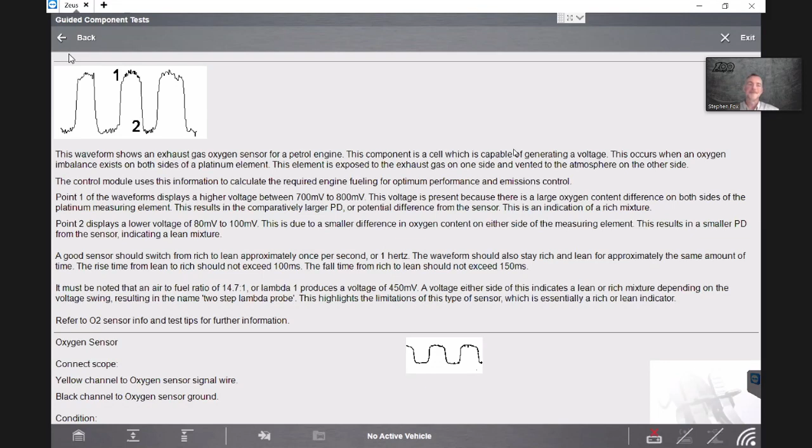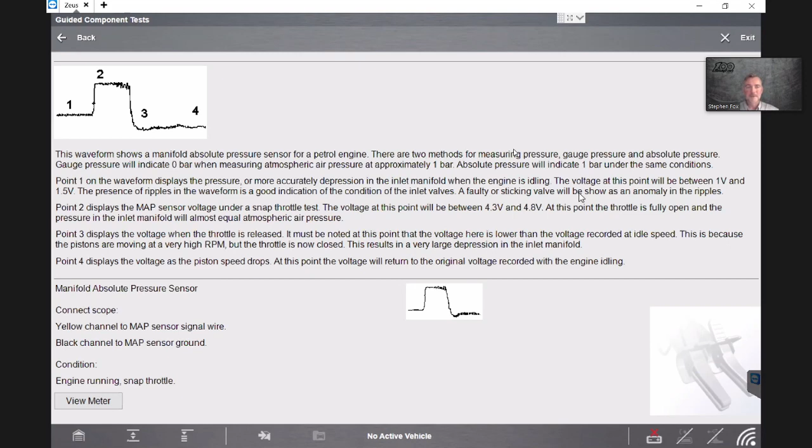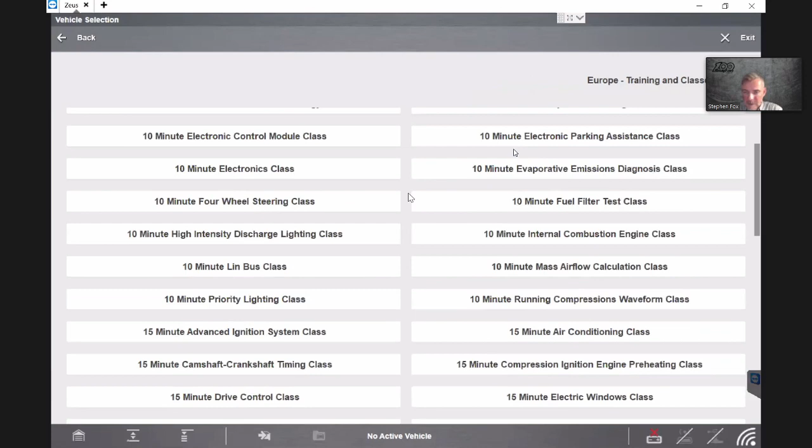View meter, scope calibrates. I come back from there, back from there again. Something I get asked about - CAN bus. We can test the physical layer of CAN bus at the 16-pin data link connector you guys plug into using your Bluetooth module.

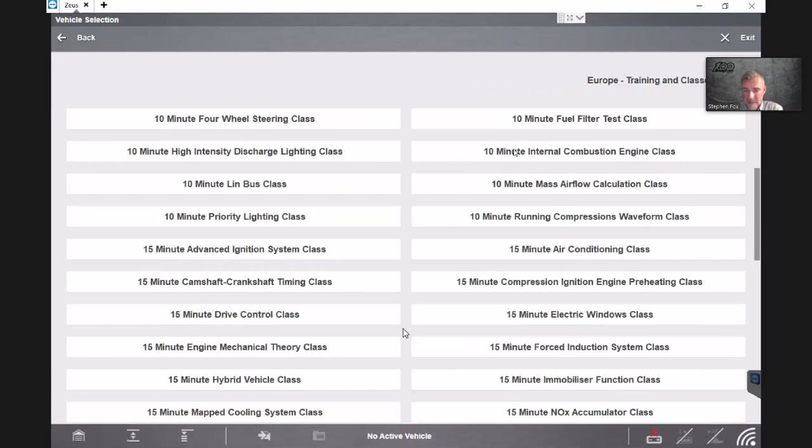15-minute waveform, a lot of bedtime reading. Apologies, 20-minute CAN bus - it's a lot of bedtime reading in here, to be fair. When I think of 20-minute CAN bus, if you're not familiar with the architecture, 20-minute CAN bus, geeky stuff - arbitration, error handling, signal quality.

All right, I just want to take a look at waveforms. So let's assume we have a communication problem, done a code scan, and we're starting to think, is it the scan tool? Well, as I said, we are now aligned. Most of the cars you plug it into have to have CAN network integrity to communicate with the scan tool. So sometimes if there's a CAN problem, no comms. So let's assume we get comms and we have a module that we suspect is not communicating.

Maybe it's a BCM or whatever module it happens to be. Next, ideally, we should get to the 16-pin. This at the top here is a representation of a good example. I don't really want to get into this now - we could probably spend hours talking about CAN, baud rates, speed, signal quality and all sorts - but all I'm looking for at the 16-pin is a mirror image, a symmetrical mirror image.

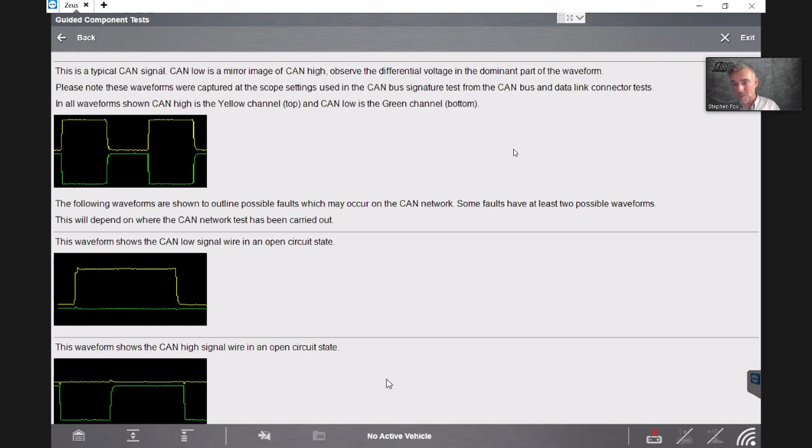The yellow one is CAN high, pin 6. Green one is pin 14, CAN low. So the 16-pin - what we've done in this case study, in this tutorial, is given the end user, obviously we can't tell you what the problem is, we'd love to, but we've given you an example of a sentence associated to every poor representation you might see on the oscilloscope.

So we're using 2 channels now, aren't we? We're using the yellow and the green simultaneously. Now, you might be thinking, as I would be at this stage, that's cool, he's just showing me on the scope - how do I know to set this up? So on the tutorial, come all the way down the bottom.

There you go - pin 6, 14, black channel to ground, key on engine off, yellow 2.5 to 3.5 volts, 1.5 to 2.5. And then you've guessed it, scroll down to view meter.

Now, if you remember when we were evaluating this, I said when I was going through the time-based settings on the scope, the time base for a standard CAN protocol is 2.0A with 200 microseconds. So you can see that preset time base, 200 microseconds. And over here, they're staggered because we need them to get the mirror image - can't have them overlaying each other, right?

And 5-volt scale, all right? So you need 5-volt, don't we? Okay, so now though, we could, couldn't we, hypothetically - let's assume we have a comms issue - we could go to the 16-pin, physically track down said module, which we're doubting or querying in our heads. Is there a communication problem?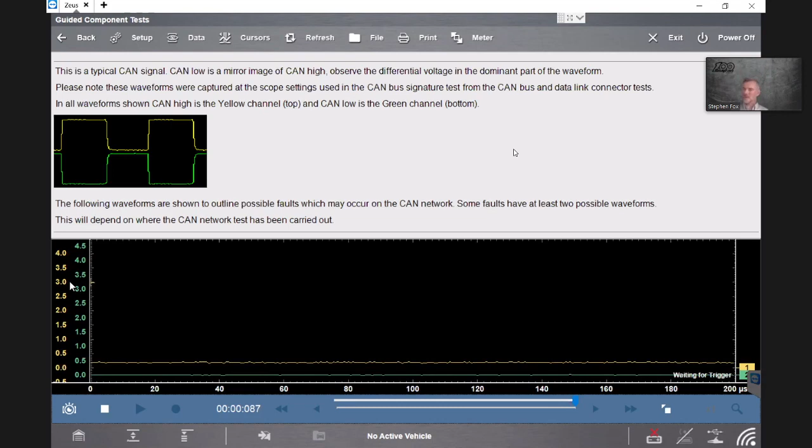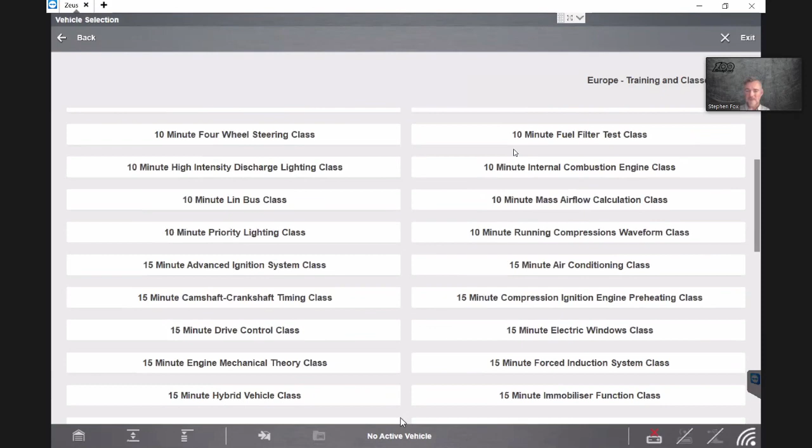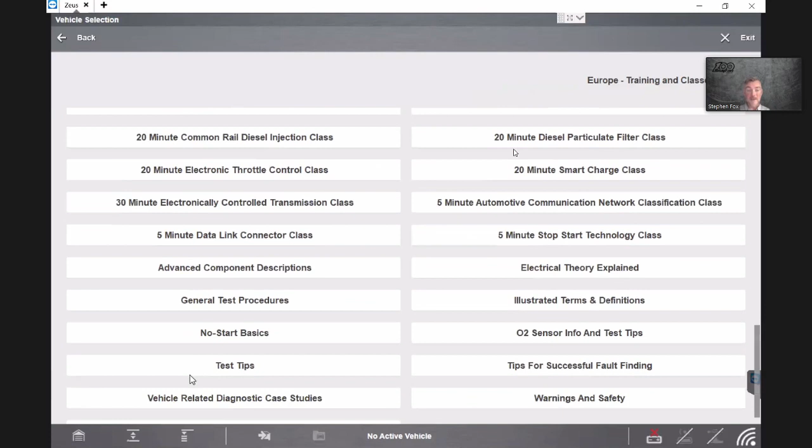Okay, so back from here, now go back to the home screen, but please have a look in here if you're unfamiliar. Just before I do, I'm conscious of time. There is down here, because I don't think customers are too aware of it when I talk about it, vehicle-related diagnostic case studies. I don't want you to look, but just bear in mind where it is, okay? Guided component tests, training and classes, how to - that was the path. And then vehicle-related case studies, okay? So there's the path up here.

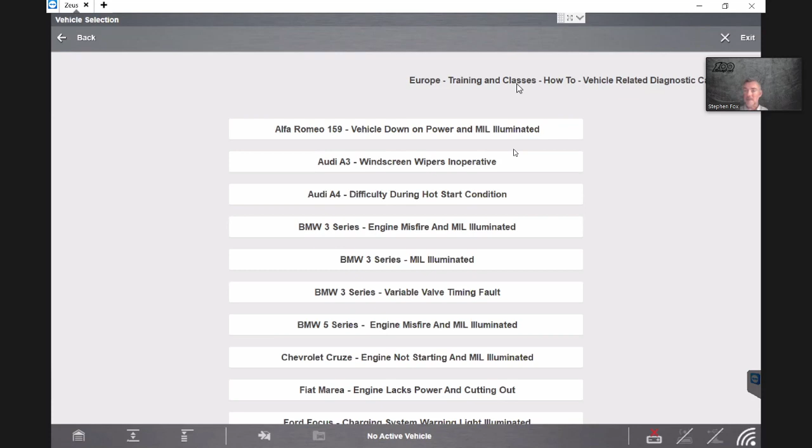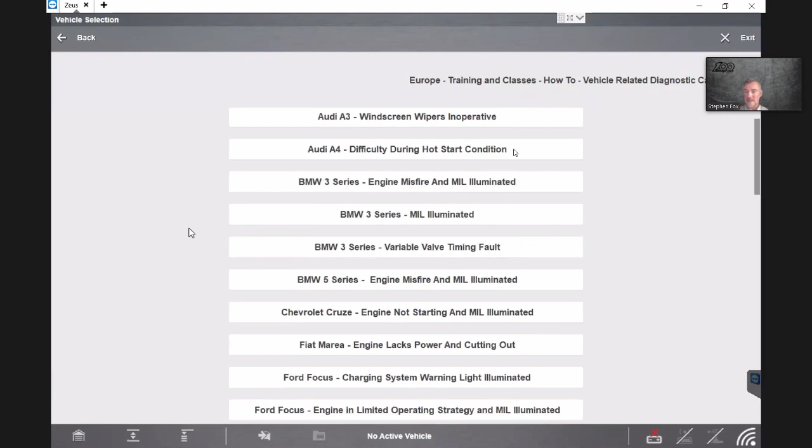These are all captured out in the field. Most of these are utilized in the scope from a diagnostic point of view - there's all sorts of stuff we found. I don't want to go through them all, but you kind of get the gist, guys. There's a few in there - quite a few, to be fair. A few oddball ones. Anyway, all right.

Now I want to, bottom left, go into guided component tests and just prove my theory. We're going to choose a petrol injector because we know all about those now. 2012 Rio, double overhead cam, that'll have one - 1.4 engine injector. Just quickly, you know, we just done the whole 16-pin thing, didn't we? So data link connector, component information.

So how many of us knew watching this that was incorporated in the software? Maybe you did, I don't know - this is where I can't see you. Okay, but yeah, there's the information you need - what pins what, circuit test, CAN bus, signal, out of range, suggesting resistors in the network, 58 to 62 ohms. Okay, I want to come back from that though.

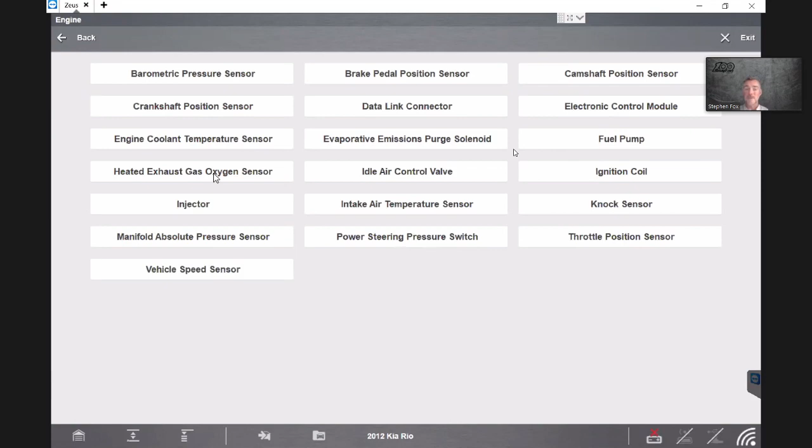Where I was going was injector. I want to go straight to signature test. Please take a note though, guys, of the component information. How does it work? Where is it? What pin is what at this component?

12-volt supply on this one, pin 2, switch ground. Is it direct or indirect injection? That's going to dictate where the actual injector's fitted. Is it in the head, in the manifold? Or best test location down here, maybe we couldn't get to the injector.

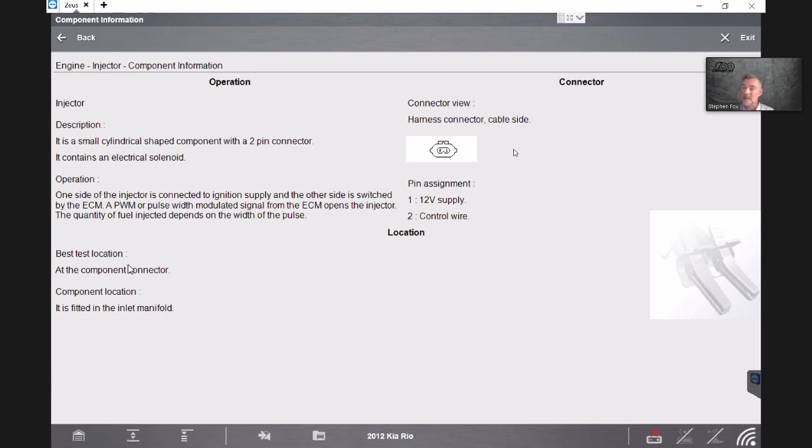So maybe it was tested at the harness connector, or maybe it was even tested at the engine ECU. Believe me guys, some of these tests were - I can vividly remember a few BMW 3 Series that I did at the engine ECU, and a Land Rover V8 that I did at the engine ECU at the kick panel. So top left, go back.

And signature test, pin 2, ground. There, if you look closely, that's the little hump I was referring to. Anyway, look, 14 volts to 0. So in your heads, remember we started at a voltage, then we pulled down to ground, and then we had our electromotive force, didn't we? Inductive kick, 70 volts.